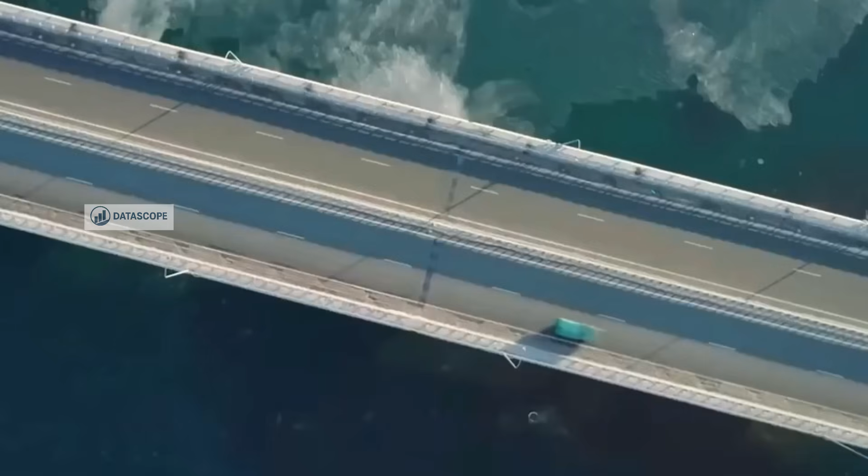The Hong Kong-Zhuhai Macau Bridge is a mega project that spans over 55 kilometers in a heavily trafficked sea. Initially deemed unrealistic due to challenging conditions like strong currents and a weak seabed, the project faced significant skepticism. The immense pressure of the ocean posed a threat to the structural integrity of any built framework.

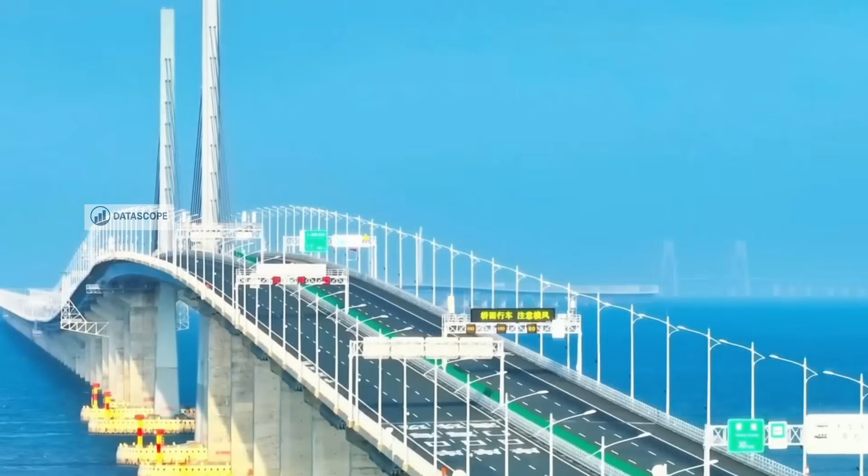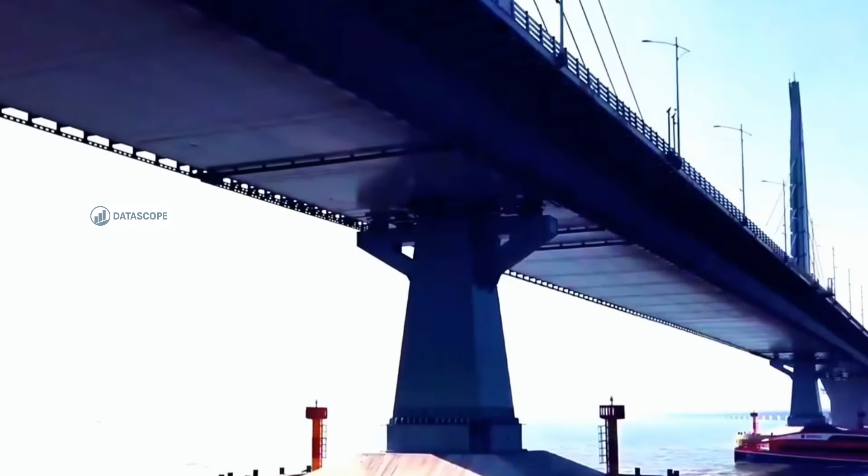Despite concerns from the global community, I observed that China persisted in its commitment to the project. Ultimately, this ambitious plan transitioned from a mere blueprint to a groundbreaking reality. This megaproject cost more than $19 billion and has a design lifespan of up to 120 years.

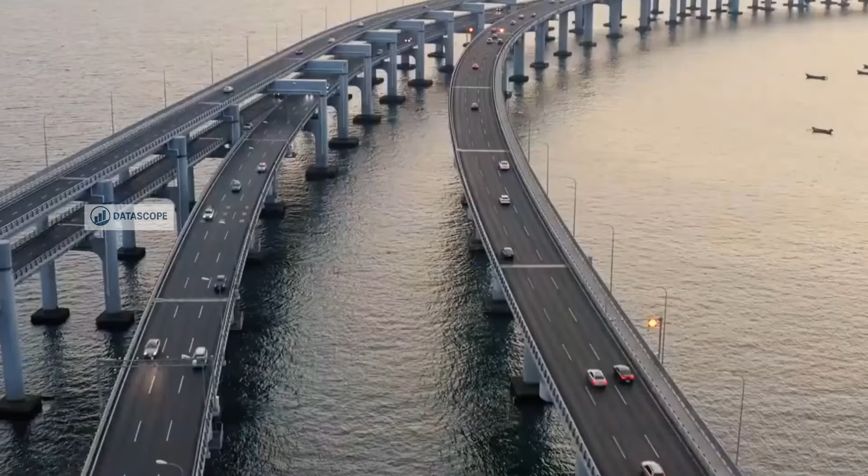It is comparable in scale to linking dozens of ordinary sea-crossing bridges together. The challenge was to lay the foundation and assemble such a massive transportation system in the middle of the ocean. The Hong Kong-Zhuhai Macau megaproject is a complex sea-crossing transportation system.

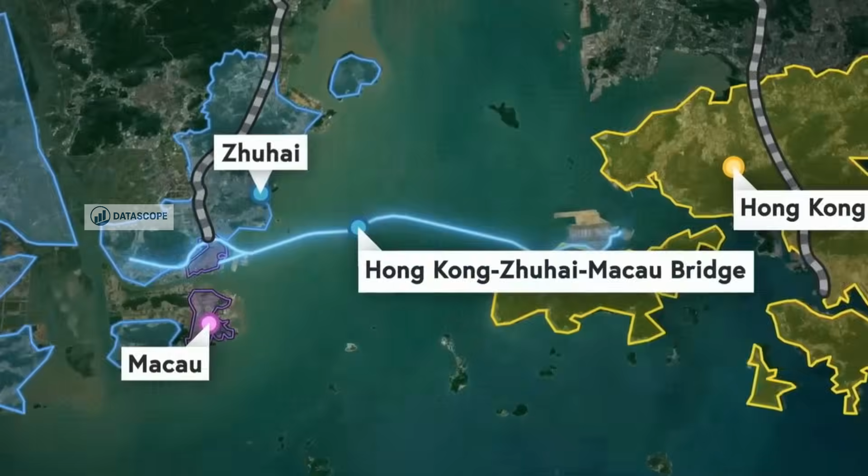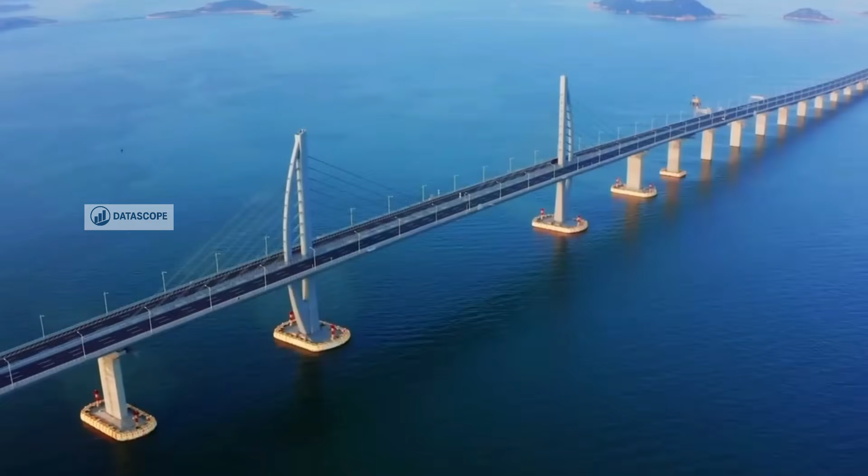It connects the three regions of Hong Kong, Zhuhai, and Macau through multiple integrated types of structures within a single route. On the surface of the sea, the most prominent features are three large-scale cable-stayed bridges, Qingzhou Channel Bridge, Jianghai Channel Bridge, and Jiuzhou Channel Bridge, which are designed to span major shipping channels with significant navigation clearance.

Between these cable-stayed bridges lies a continuous system of beam bridges stretching for dozens of kilometers, forming a stable and seamless roadway across the water. However, in areas with dense maritime traffic or strict height restrictions, the bridge cannot continue as a high-elevation structure.

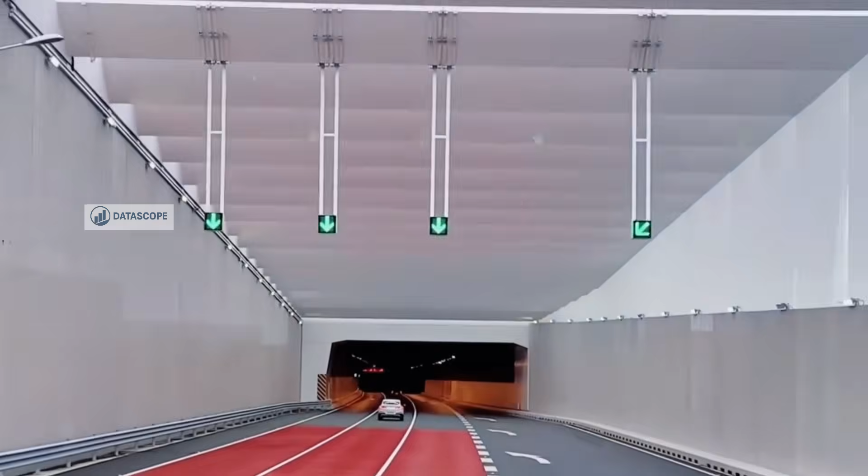These design choices reflect the necessity to accommodate both navigation needs and the limitations imposed by the surrounding environment. Overall, the integration of these different types of bridges illustrates a thoughtful approach to engineering in a challenging maritime context. I learned that the cable-stayed bridges are the most technically complex components of the infrastructure network. These bridges are crucial for ensuring the functionality and stability of the entire route.

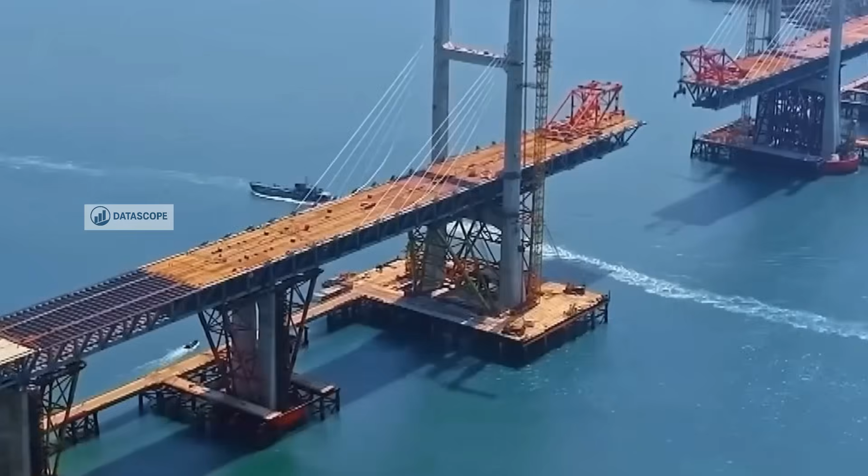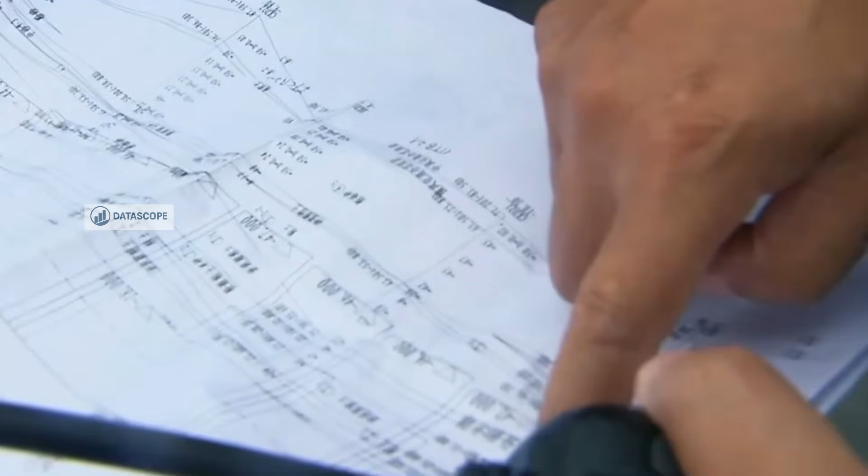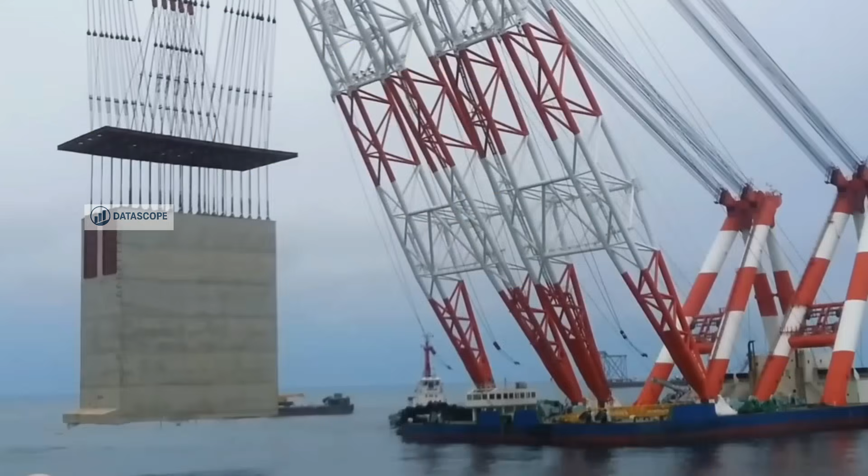The project starts beneath the water before the bridge structure rises above the sea surface. Weak geological conditions and complex construction environments pose significant challenges. Selecting the appropriate method for building the bridge foundations is a critical factor in determining the stability of the entire structure. Currently, three main solutions are commonly used: cofferdams, caissons, and pile foundations.

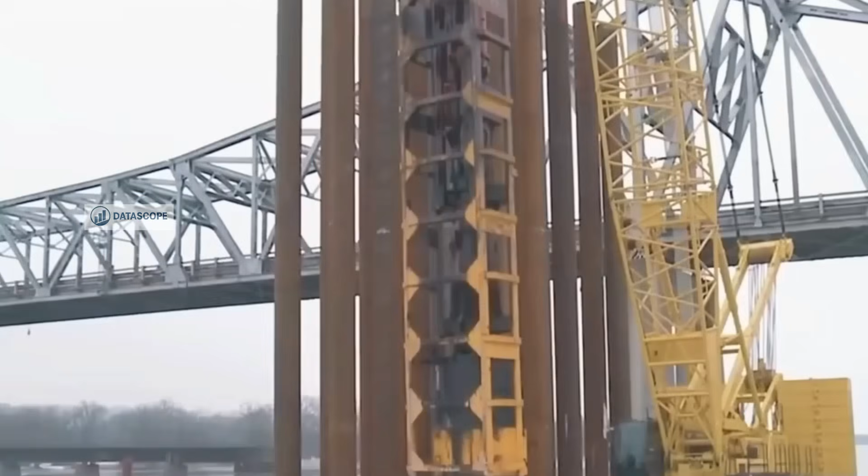Among modern solutions, pile foundations are considered the safest and most flexible option, especially for large load-bearing structures such as sea-crossing bridges. Instead of creating a massive foundation at the surface, this method transfers loads deep into the ground through a system of reinforced concrete piles.

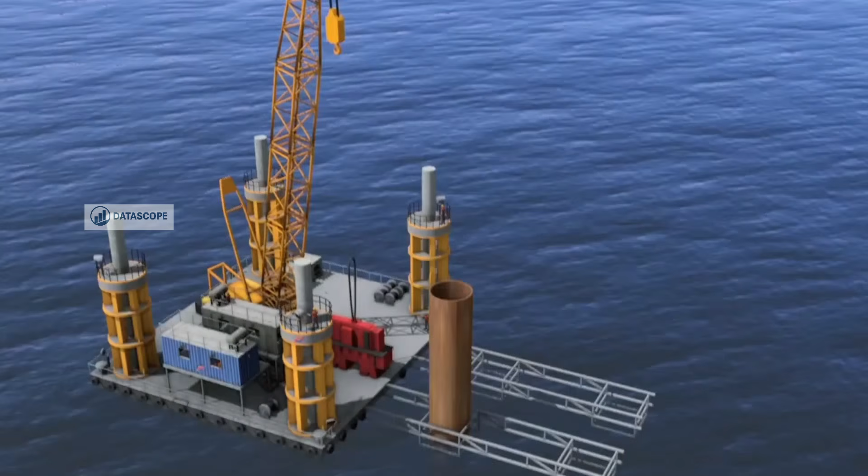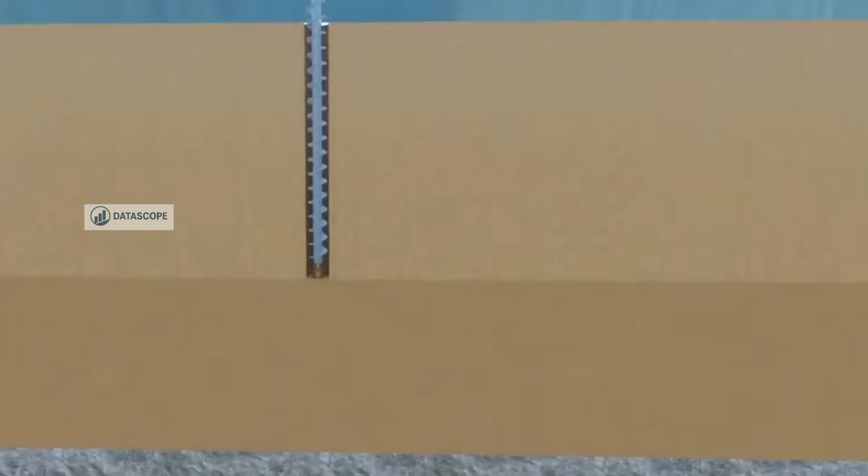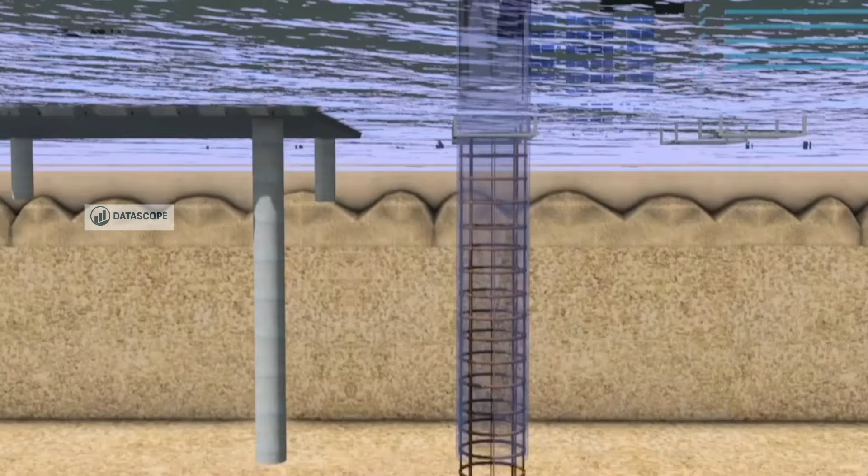The construction process begins with the precise positioning of each pile location, followed by the installation of a steel casing to stabilize the drilling area. The drill bit then penetrates through weak soil layers until it reaches stronger soil or bedrock capable of bearing the load. Once the design depth is reached, a steel reinforcement cage is lowered into place, and concrete is poured from the bottom up using a tremie pipe, minimizing mixing with seawater.

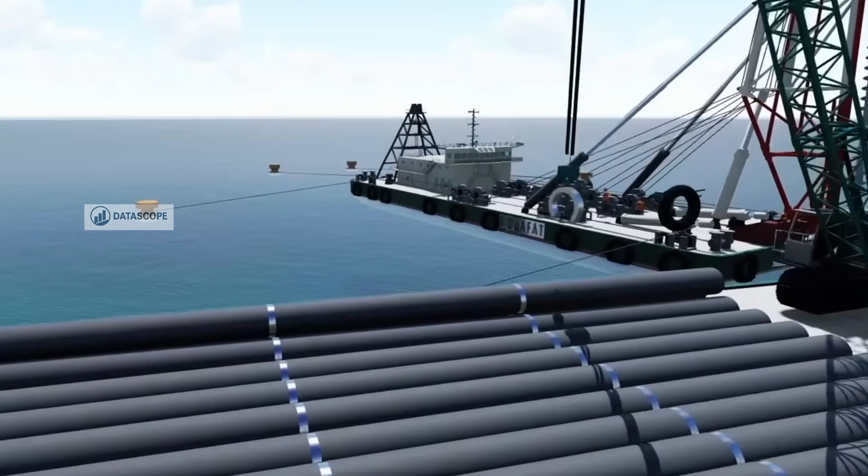The entire process must be carried out continuously to ensure consistent quality. After completion, each pile undergoes strict inspection before proceeding to the construction of the pile cap above.

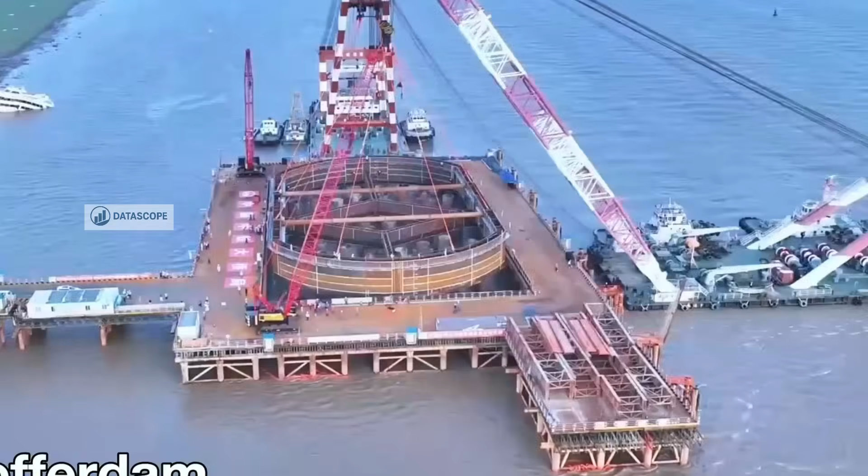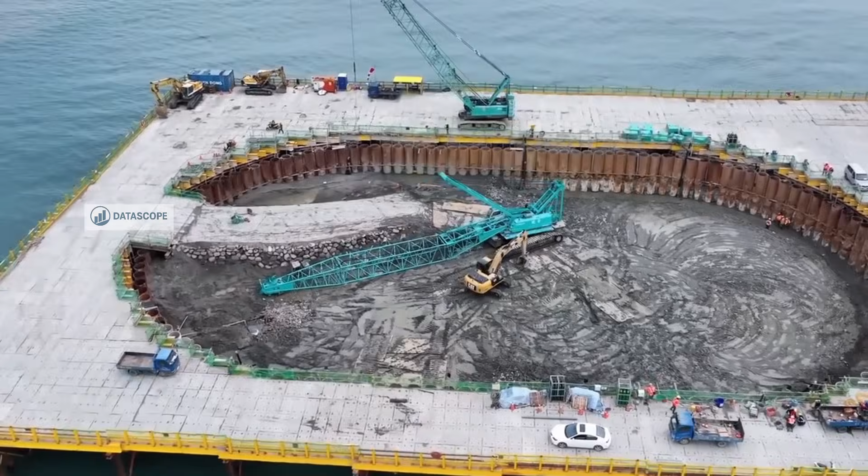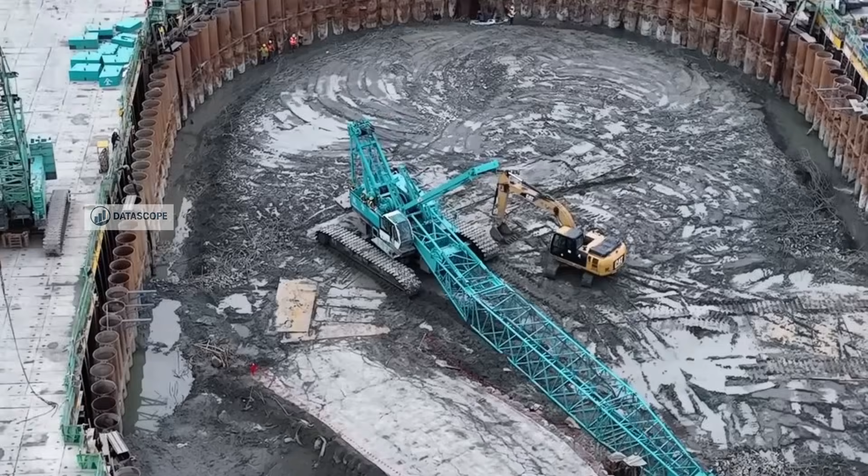If pile foundations are a way of going deep to find a stable base, then a cofferdam takes a completely different approach. It creates a dry working area right in the middle of the water, so construction can be carried out directly. The principle behind this method is quite straightforward. Instead of working directly in a submerged environment, engineers create a temporary dry space in the middle of a river or sea, allowing construction activities to proceed in conditions similar to those on land.

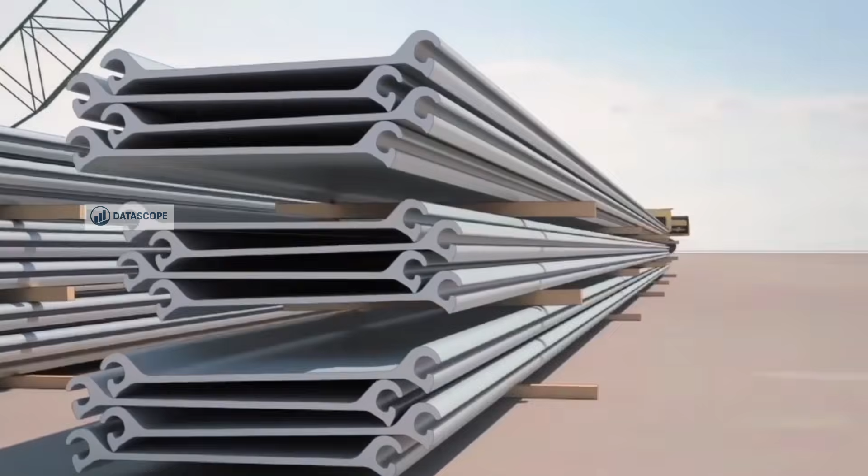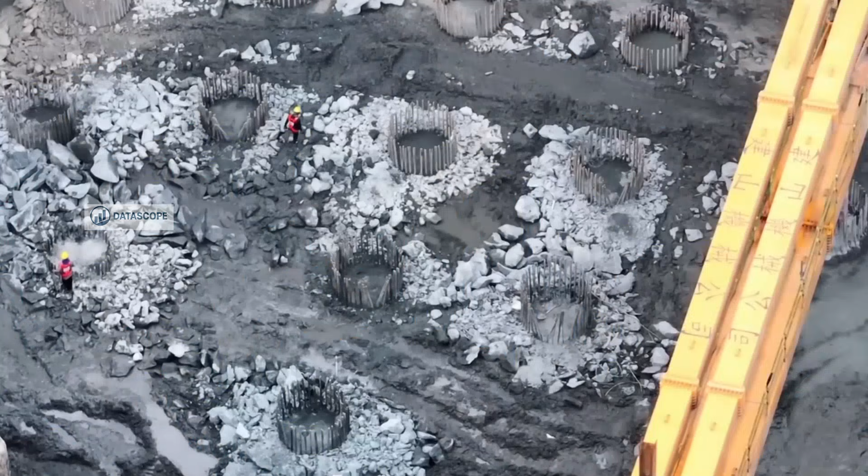To make this possible, a temporary retaining wall system is installed around the pier foundation location. Typically, steel sheet piles are driven deep into the seabed or riverbed to form a closed enclosure that prevents water from entering from the outside. Once the enclosure is completed, the water inside is pumped out, turning the area into a dry pit surrounded by water. This allows workers to directly access the foundation base, install reinforcement, and pour concrete under much more controlled conditions.

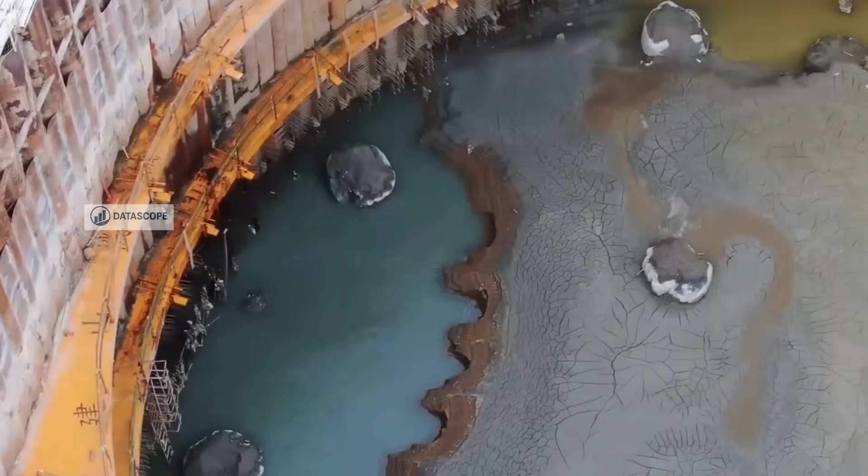However, the biggest challenge of cofferdam construction lies in water pressure and seepage. When the water level outside is significantly higher than inside the enclosure, hydrostatic pressure can force water through gaps, or even push it upward through the soil beneath the structure.

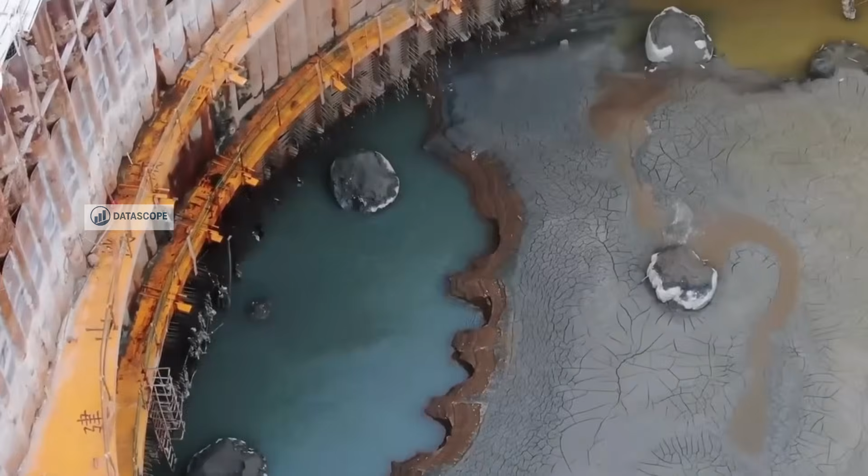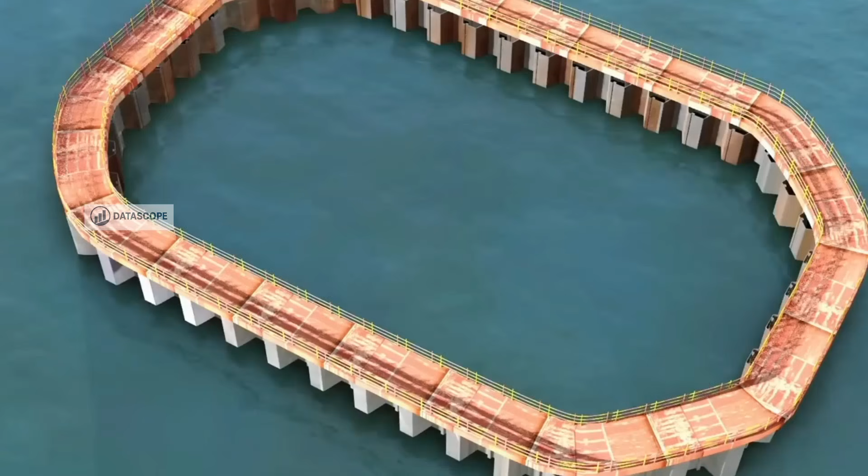To reduce these risks, the depth of the retaining walls must be carefully calculated, and the dewatering system must operate continuously. Pumps are usually arranged with backup redundancy to ensure the construction area remains dry at all times. After the foundation work is completed, water is gradually allowed back into the enclosure to equalize pressure before the entire temporary structure is dismantled.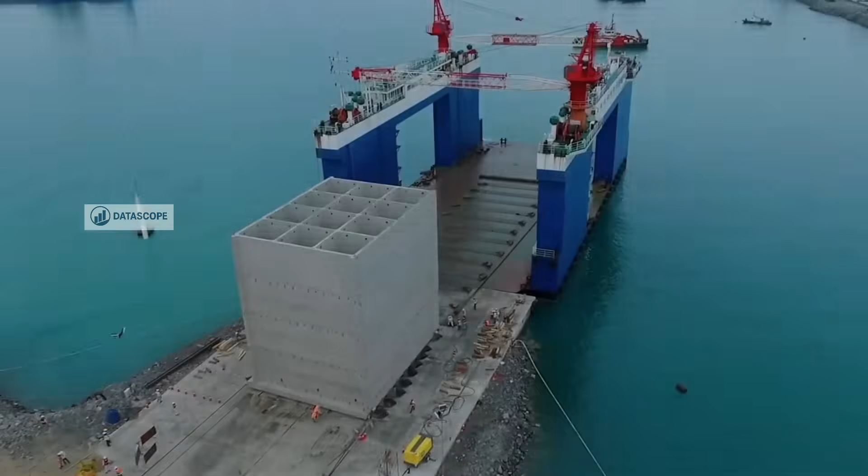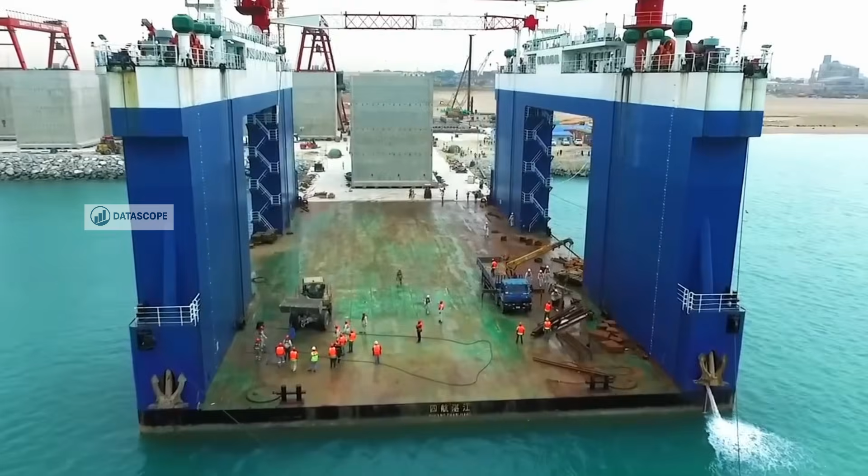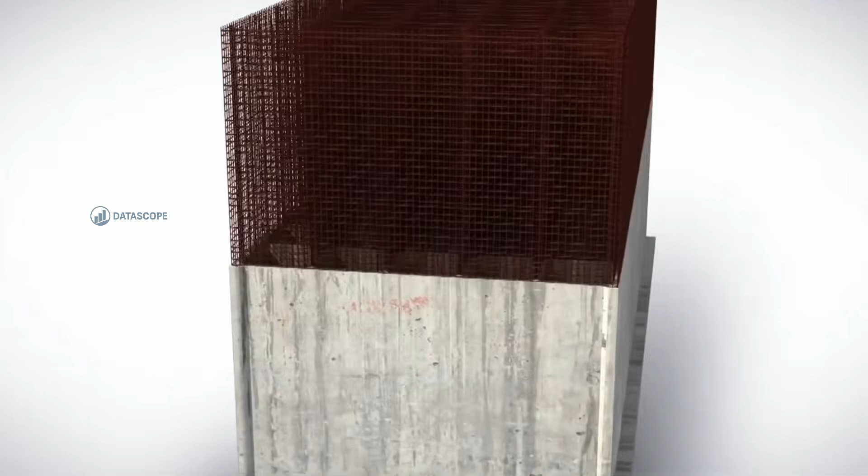In areas with great water depth or complex current conditions, engineers often use a particularly stable foundation solution: caissons. Unlike methods that create a dry working space for construction, caissons allow a massive concrete structure to be placed directly onto the riverbed or seabed, where it becomes a permanent part of the foundation from the very beginning.

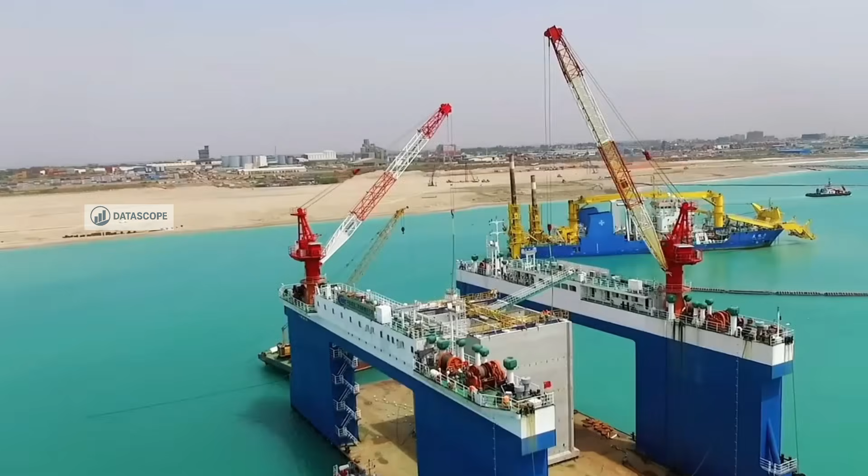Typically, caissons are prefabricated onshore in the form of large cylindrical or box-shaped hollow structures, then transported to the installation site by barge. When lowered into the water, the entire process is carefully controlled using cranes and positioning systems to ensure the structure is placed exactly at its designed location.

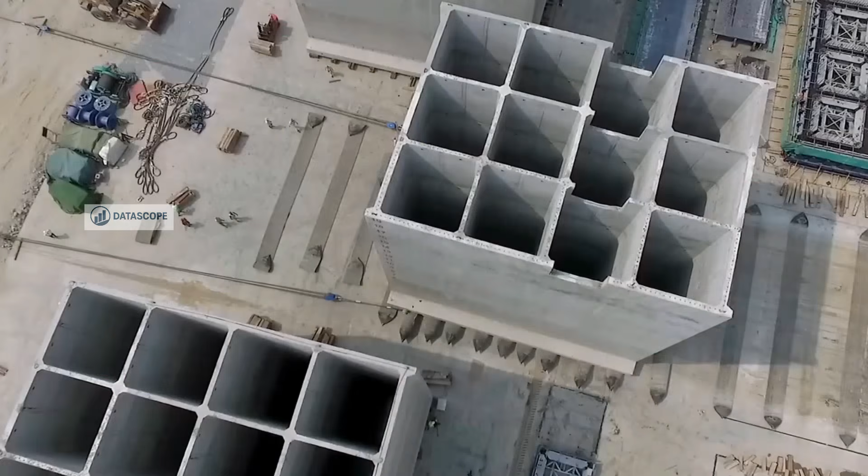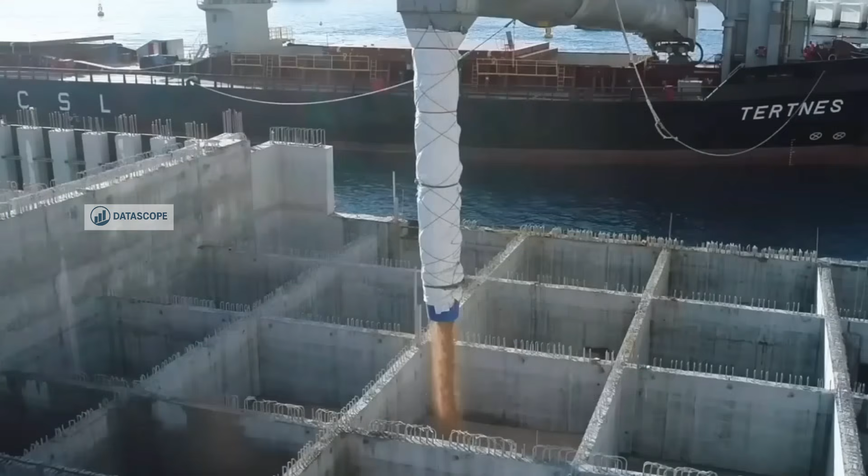The base of the caisson is usually formed with a cutting edge that helps the structure penetrate soft soil layers and gradually settle into the ground below. Once it reaches the required elevation, the interior is filled with materials such as sand, rock, or concrete to increase its weight and secure it firmly in place.

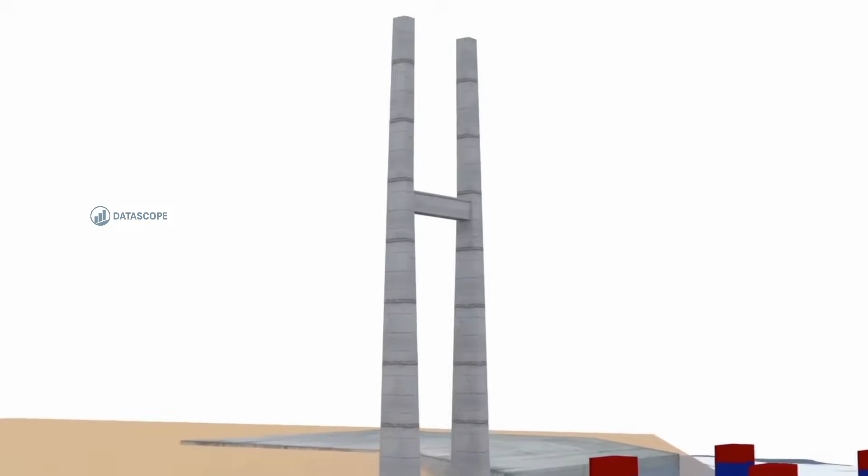Thanks to their large size and heavy weight, caissons provide a very stable foundation for bridge piers that carry massive loads, especially in large river crossing or sea crossing bridge projects. This method allows efficient construction even in deep water environments, while also helping engineers maintain precise control over the position and shape of the foundation from the earliest stages of construction.

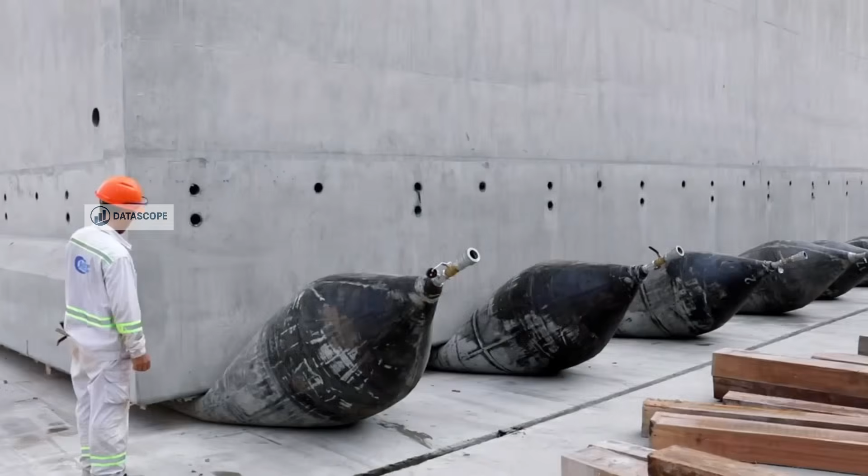In many modern mega-bridge projects around the world, caissons have become one of the most important foundation solutions, acting like giant anchors that keep bridge piers stable in constantly changing water environments.

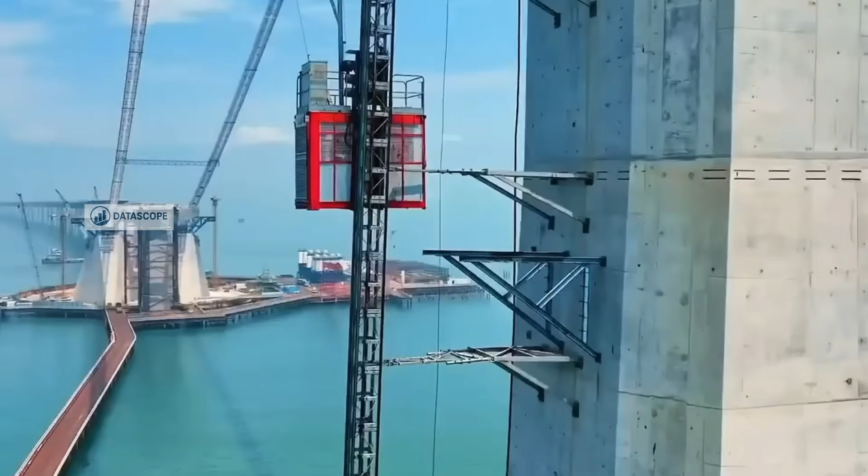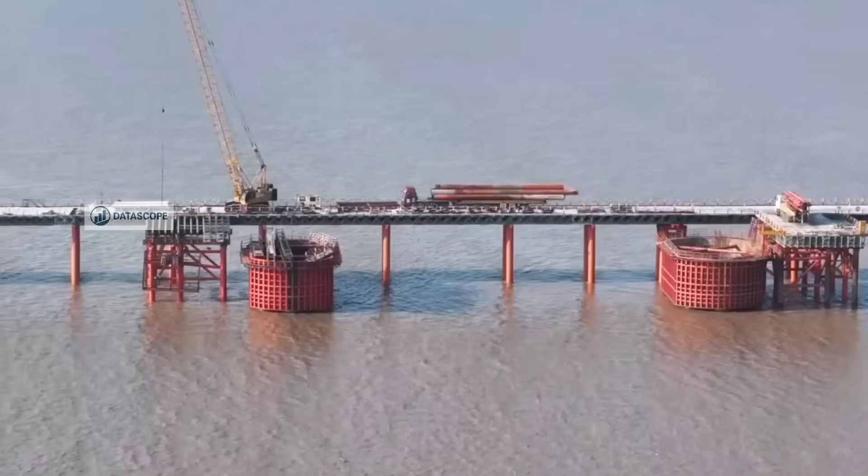After the pier system has been completed and stabilized, the project moves into the stage of forming the bridge deck, the part that directly carries traffic loads and transfers forces down to the supporting piers below. The construction process usually begins by installing temporary support systems or working platforms around the pier area, creating a stable base for the first deck segments. Some initial sections are cast in place to establish the correct elevation and alignment.

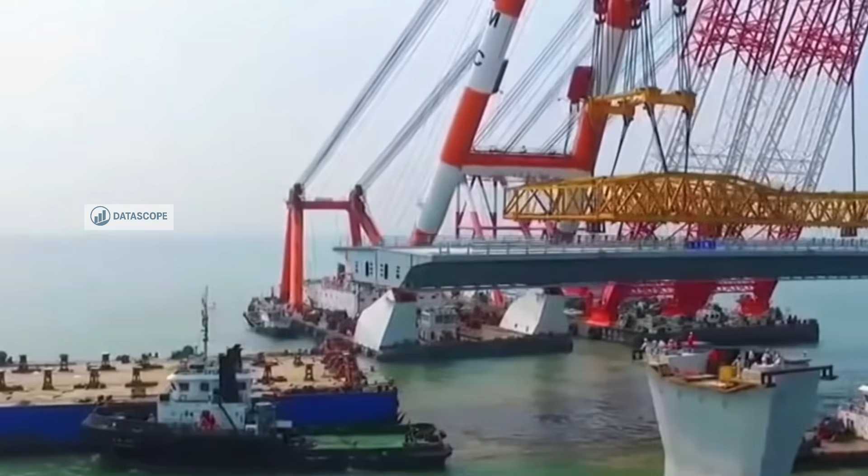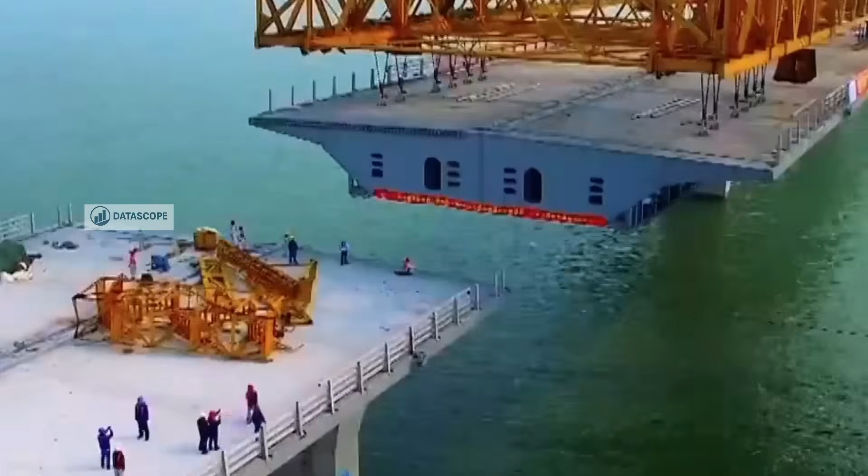Next, steel formwork systems are assembled tightly to shape the bridge girders. Inside the girder body, technical compartments are already arranged in advance to support later construction and maintenance stages. As each girder segment is cast or installed into its proper position, it is connected to the previously completed structure, forming a continuous chain that gradually extends outward in both directions.

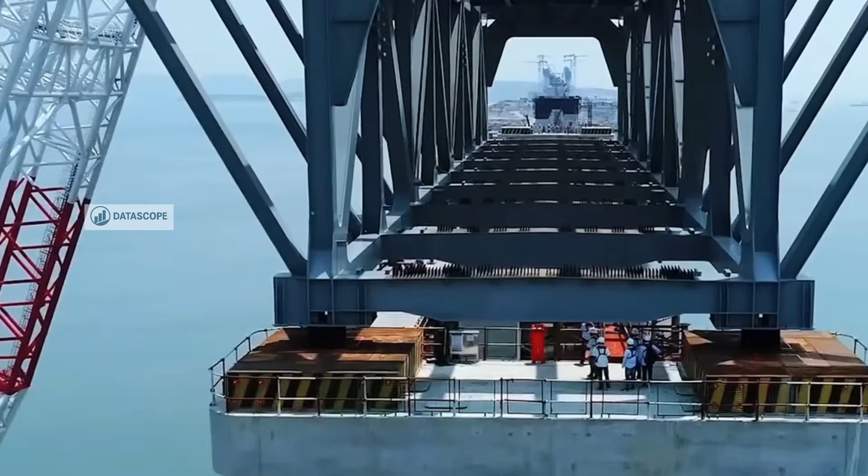By carrying out construction step by step in this way, engineers can ensure that each installed section achieves a high level of accuracy, while also maintaining structural balance throughout the entire construction process.

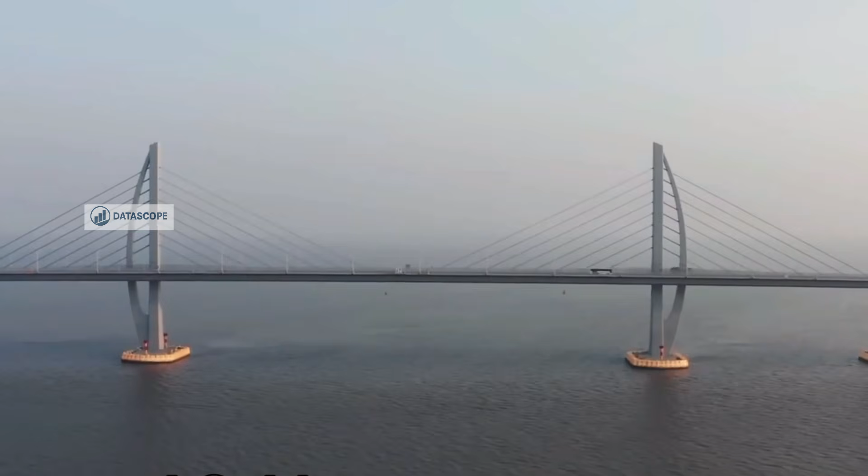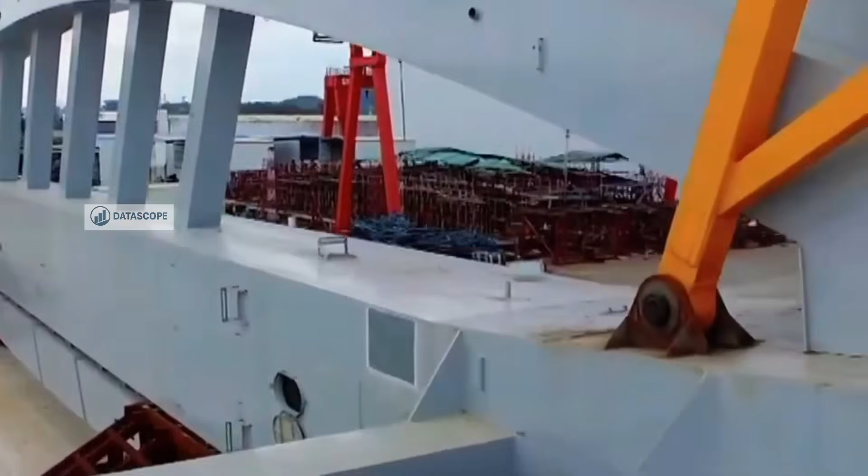Constructing the towers and cable-stayed bridge is already a complex task, but on the Hong Kong-Zhuhai-Macau Bridge, the process was further restricted by the flight corridor of Hong Kong International Airport. The bridge towers needed to be tall enough to provide sufficient clearance for large ships to pass underneath, yet they were not allowed to exceed aviation safety height limits. To solve this challenge, engineers adopted a completely different approach.

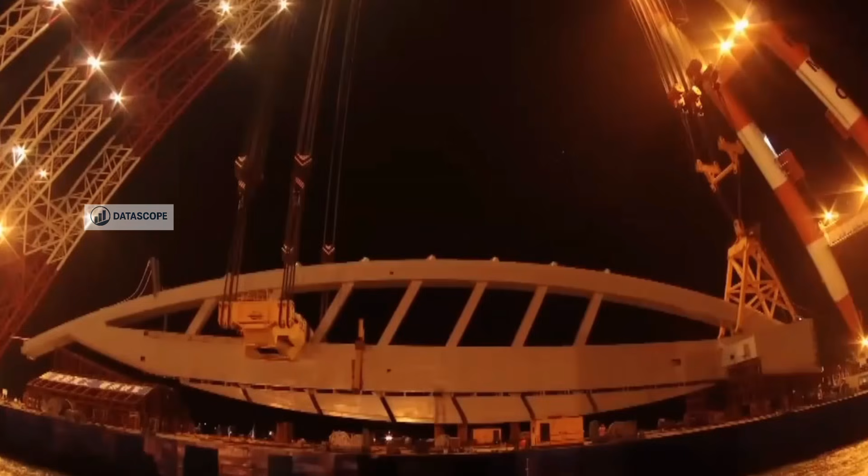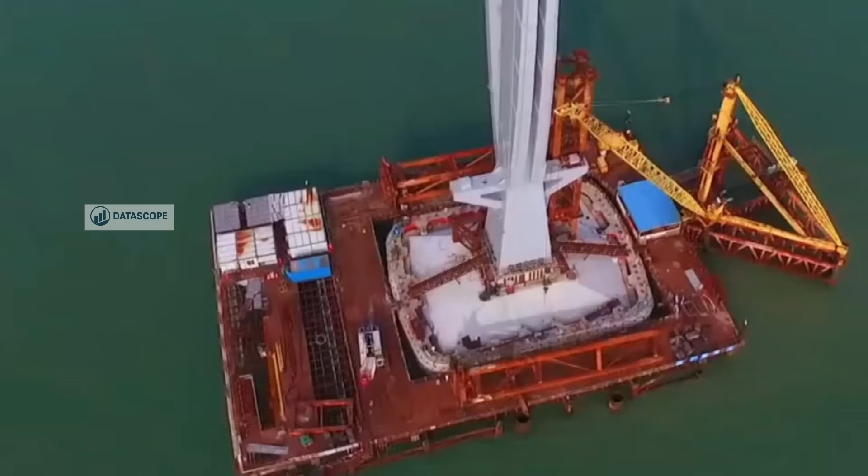Instead of building the towers vertically from the start, each structural segment was first assembled horizontally close to the water surface. A cable lifting system was then used to gradually raise the structure into its final design position. This operation proceeded slowly and under strict control because even a small deviation in force or lifting angle could have caused the entire structure to become unstable.

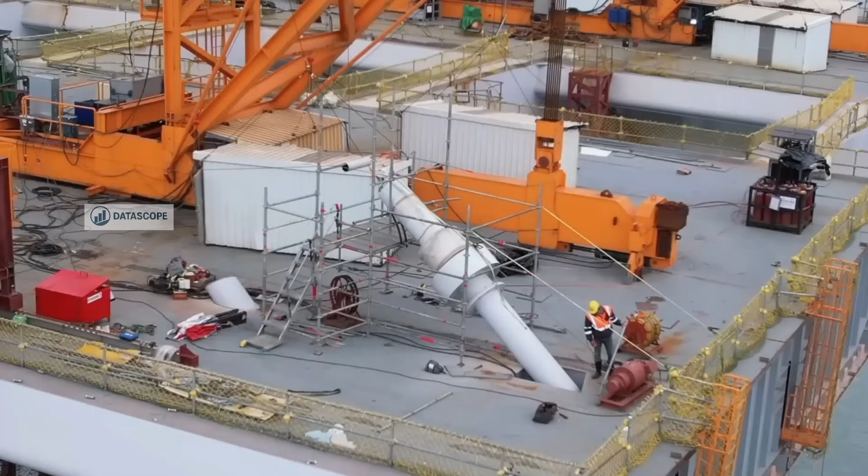Once the towers reached their upright position, the stay cables began to be installed in symmetrical pairs from both sides. Each cable was tensioned with precisely calculated force to ensure that loads were evenly distributed across the towers and the bridge deck.

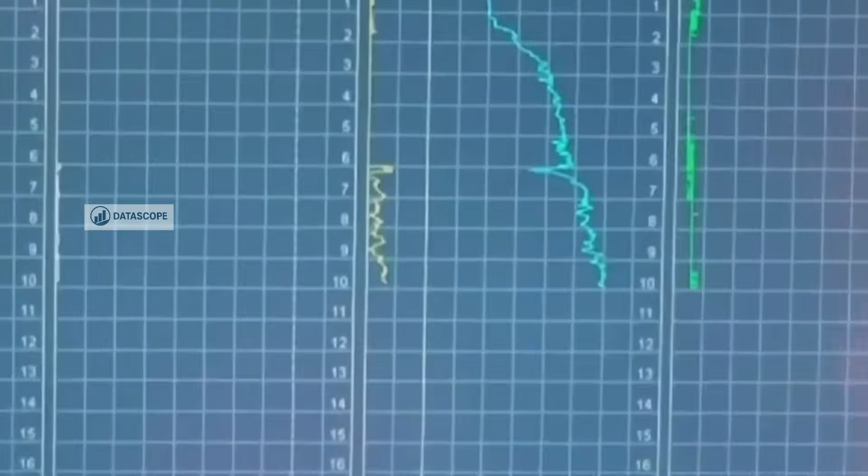Even after completion, the bridge still faces serious marine hazards. Strong year-round winds can cause cable vibrations if not properly controlled. Earthquakes and ship collisions are also constant risks, so engineers use damping systems and active marine traffic control to reduce danger. However, the biggest threat comes from chloride ions in seawater.

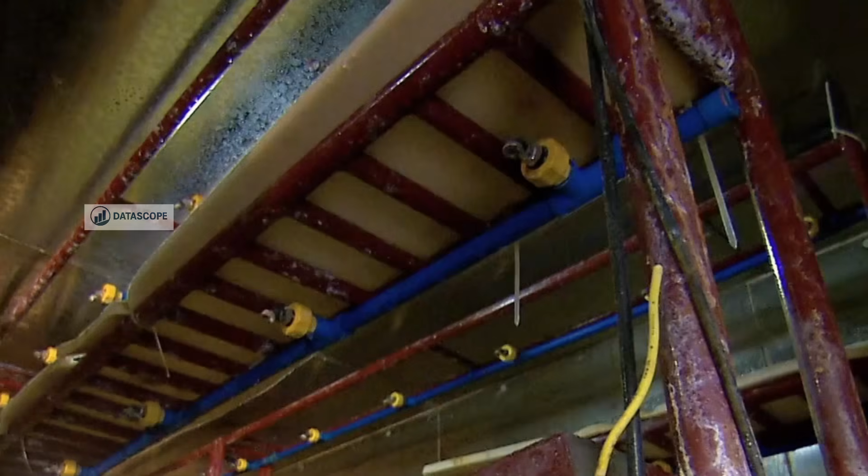These ions can penetrate concrete and slowly corrode the steel reinforcement inside, weakening the structure over time without visible signs. To prevent this, engineers selected high durability, corrosion-resistant concrete to ensure a long service life.

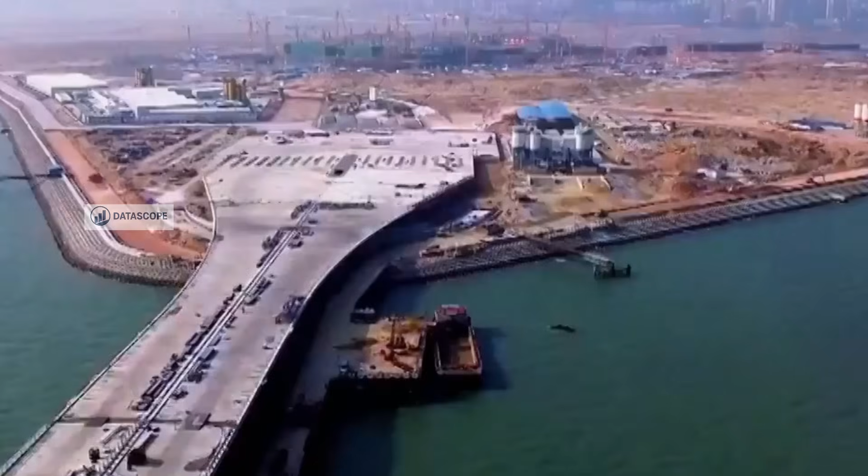In the area where this mega sea crossing bridge passes through, a complex challenge emerged. The same conflict mentioned earlier during the construction of the bridge towers appeared again. The deep water shipping channel had to coexist with the strict aviation clearance limits of Hong Kong International Airport. This contradiction forced engineers to abandon the option of a continuous bridge and switch instead to a hybrid solution that included an underwater tunnel section.

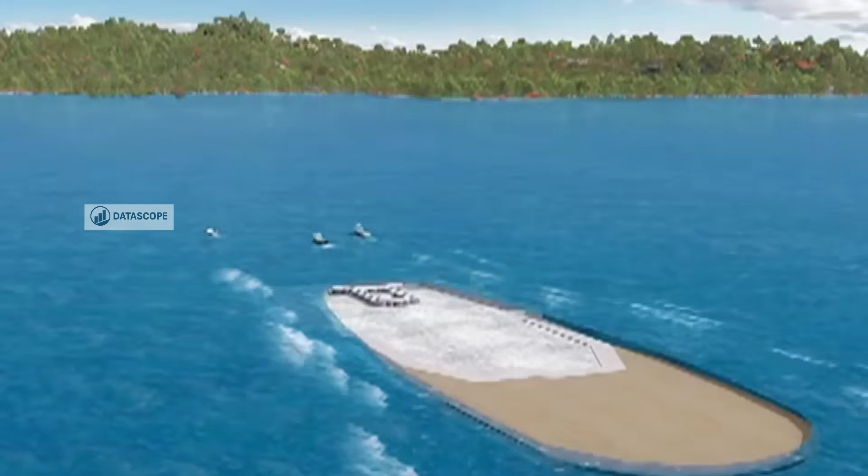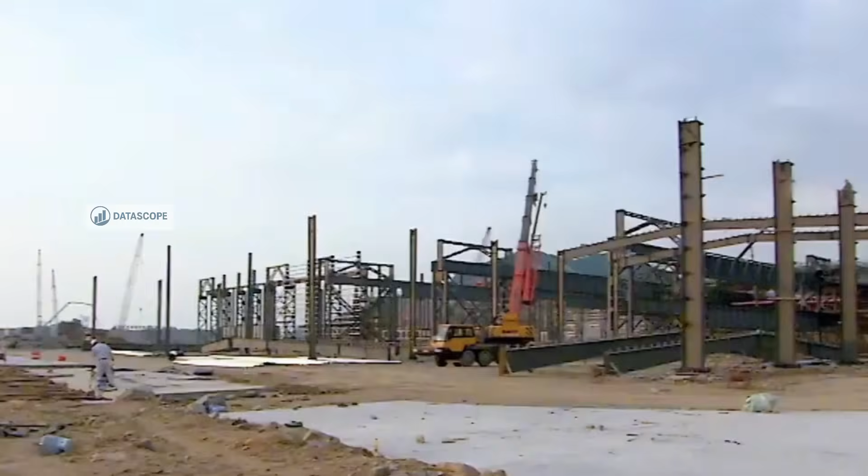However, one challenge quickly led to another. A transition point was required between the bridge and the tunnel, yet this location had no natural ground suitable for construction. As a result, the only viable solution was to create artificial islands in the middle of the sea. The seabed in this area consisted of dozens of meters of soft marine mud, which was almost incapable of supporting heavy loads using conventional foundation methods.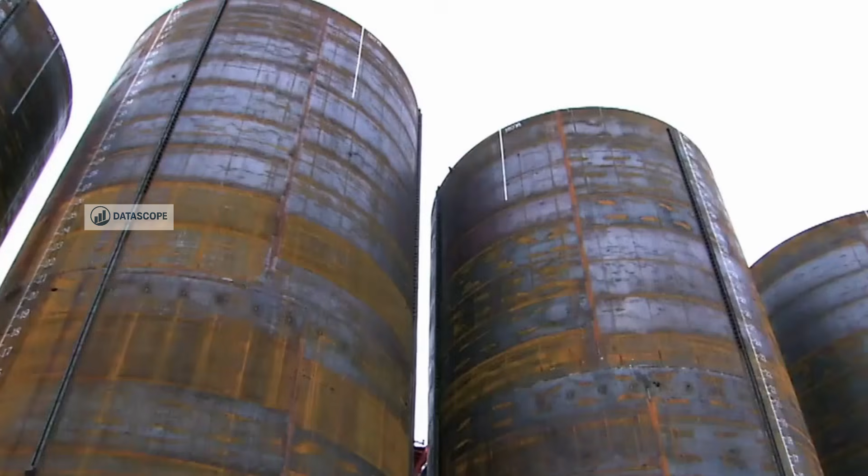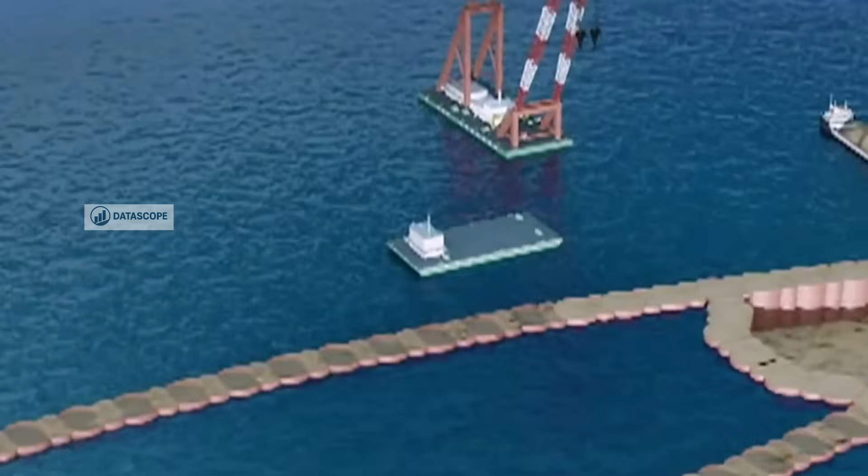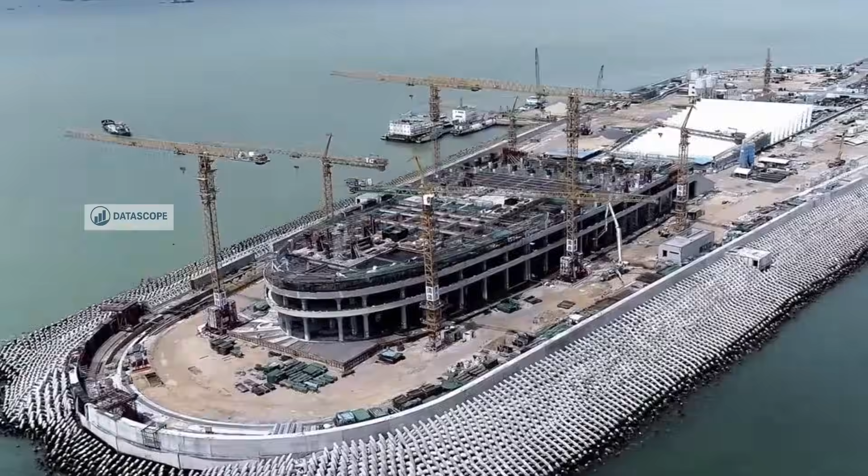To overcome this, engineers implemented a completely different approach by using massive steel cylinders to form the structural framework of the islands. Hundreds of large-diameter cylinders were transported from distant locations and installed on the seabed with extremely high precision using advanced positioning systems. After being fixed in place, the interior of these circular steel enclosures was filled with material to form a stable foundation platform for the artificial islands. This method significantly reduced the amount of dredging required and helped minimize impacts on the surrounding marine ecosystem.

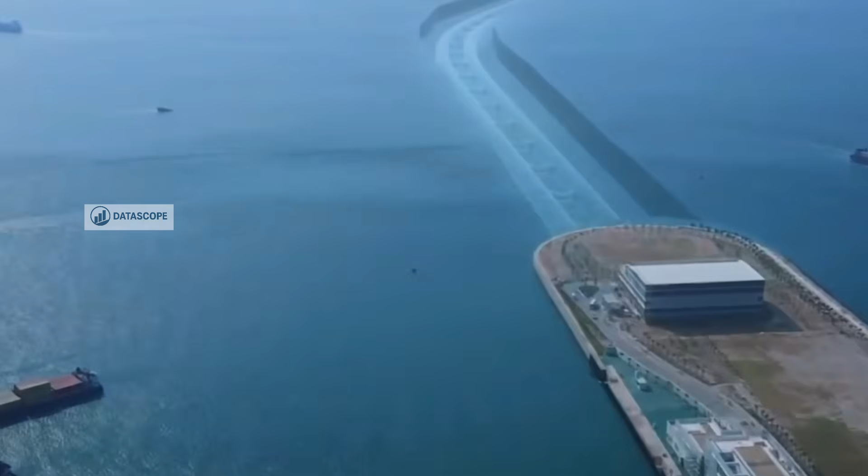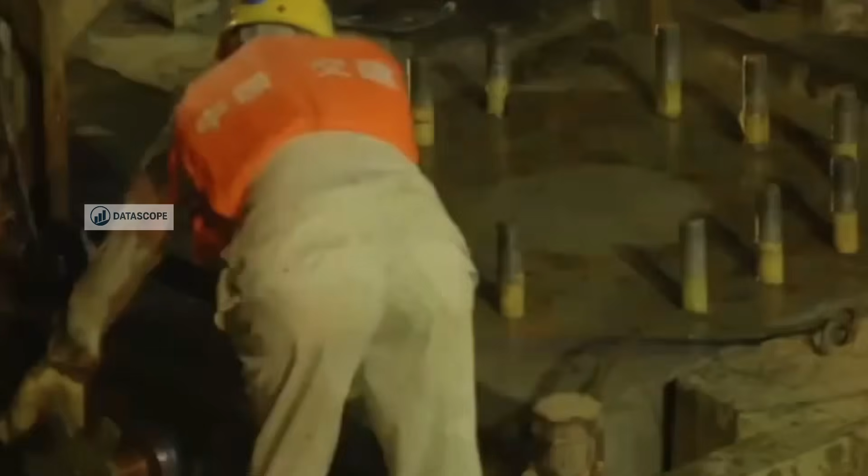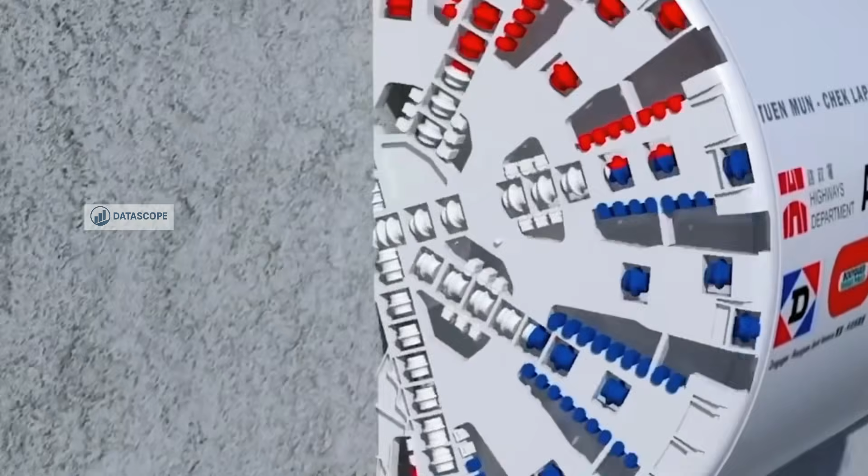After the artificial islands were completed, they served not only as foundation platforms, but also as transition points for constructing the most complex part of the entire project, the underwater tunnel section. However, a major question remained. How could engineers build a tunnel several kilometers long beneath the seabed while minimizing disturbance to natural water flow in the surrounding marine ecosystem? At first, the option of excavating the tunnel using a tunnel boring machine was considered.

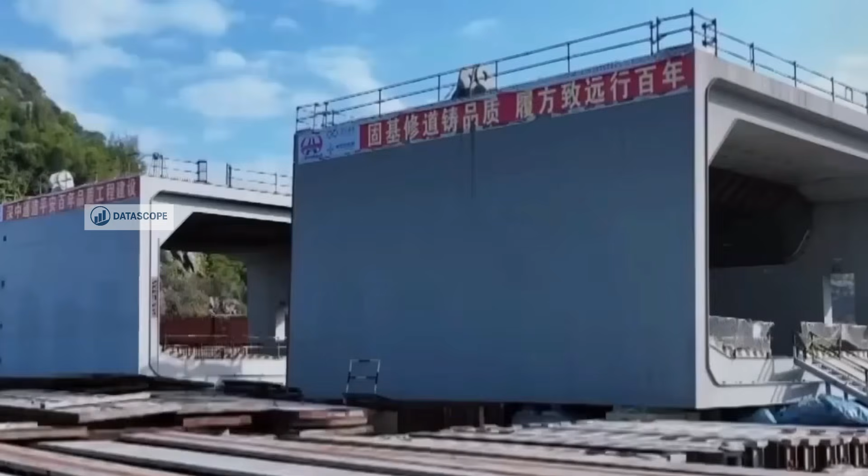However, the geological conditions at the river estuary, combined with strict requirements to avoid excessive disruption to water circulation, made this solution unsuitable. The only practical alternative was the immersed tube tunnel method. With this approach, a large trench is dredged along the seabed, after which tunnel segments are prefabricated on land, towed to the site, and carefully lowered into position for direct underwater connection.

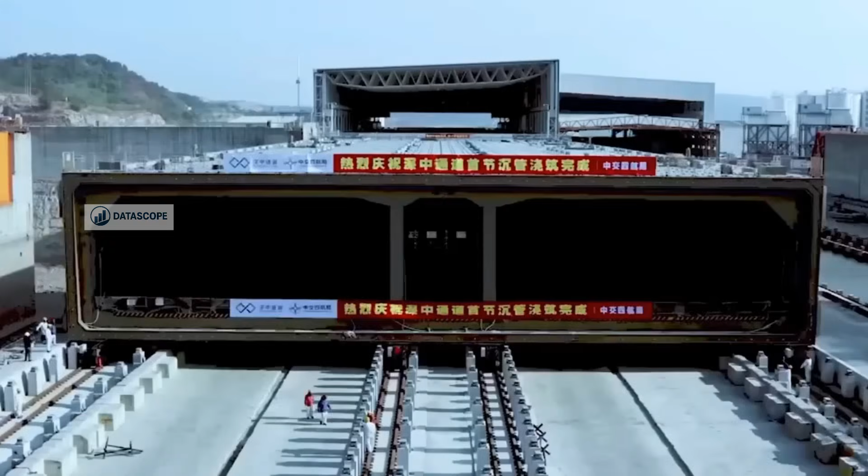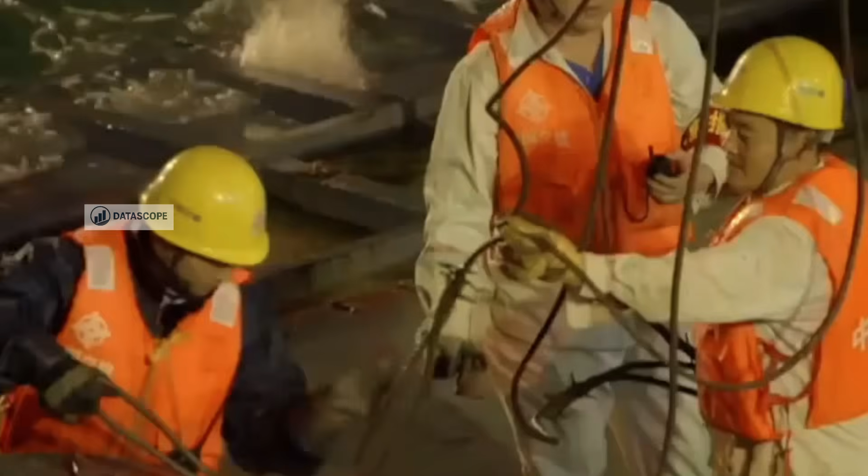Each tunnel segment was enormous, about 180 meters long, several dozen meters wide, and as tall as a multi-story building. Weighing tens of thousands of tons, handling each segment was comparable to maneuvering a massive ship underwater. To ensure construction accuracy, engineers did not cast each segment as a single solid unit. Instead, they divided them into smaller modules for fabrication, which were later assembled under tightly controlled conditions.

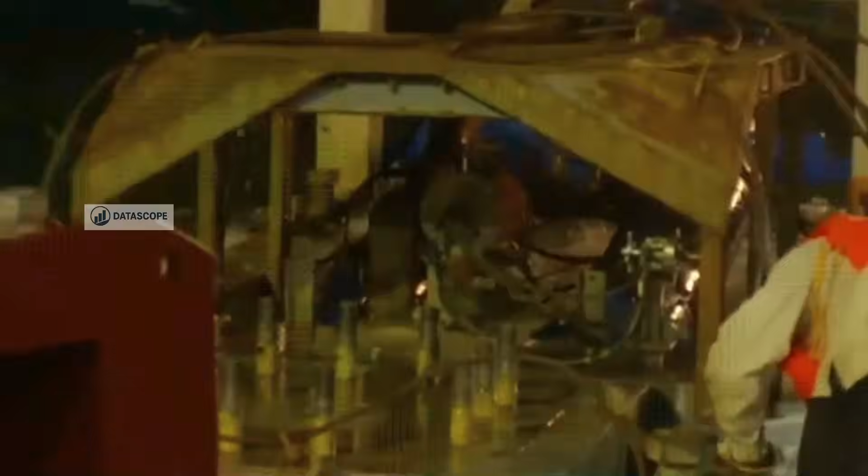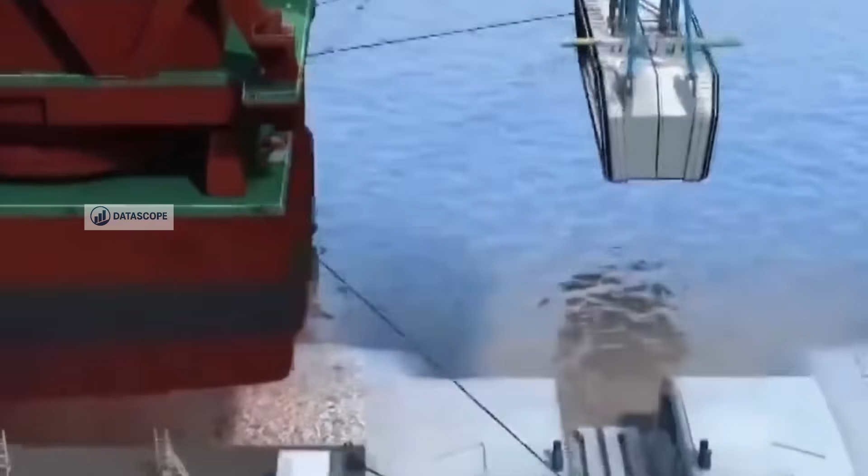At the same time, a specialized casting formwork system was developed specifically for the project. Because importing extremely expensive foreign equipment was not feasible, the entire formwork system was designed and manufactured domestically using thousands of tons of steel. To meet the construction schedule, a dedicated production facility was built in a very short time, where thousands of workers operated continuously to manufacture the tunnel segments.

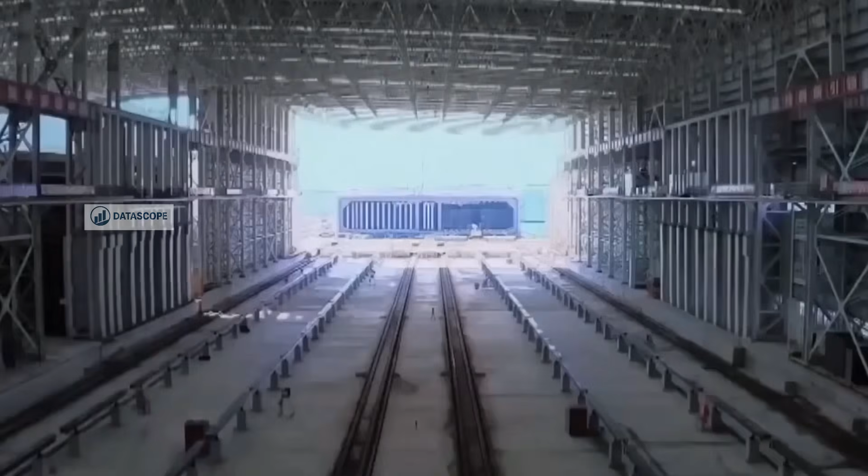Before actual installation began, engineers carried out numerous simulation tests to precisely calculate the forces acting on the cable systems and lifting equipment. In offshore conditions, each tunnel segment had to be lowered into position in muddy water and